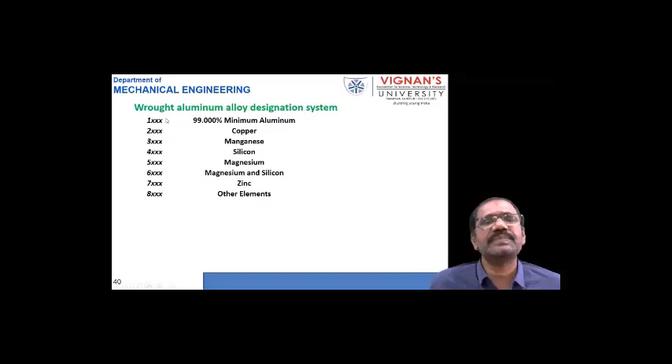Now let us see the casting alloy. So casting aluminum alloy, how we designate it. This is designated with 3 digits with 1 decimal. The cast alloy designation system is based on a 3 digit plus 1 decimal designation, like 356.0. So this is one example.

The first digit indicates, similar to that one, the principal alloying element which has been added to the aluminum. The second and third digits are arbitrary numbers given to identify a specific alloy in that series. So here you don't have the second digit for how many times it is modified. However, it is made by casting, that's why there is a modification for that one.

Next, the number following the decimal point indicates whether the alloy is a casting or ingot. What do you mean by the ingot? Ingot you have already seen. I also told what is the ingot. Freshly taken from the steel industries or aluminum industries. From the bauxite, aluminum is extracted through the chemical purification and electrolysis process. That is called an ingot, which is got from the bauxite.

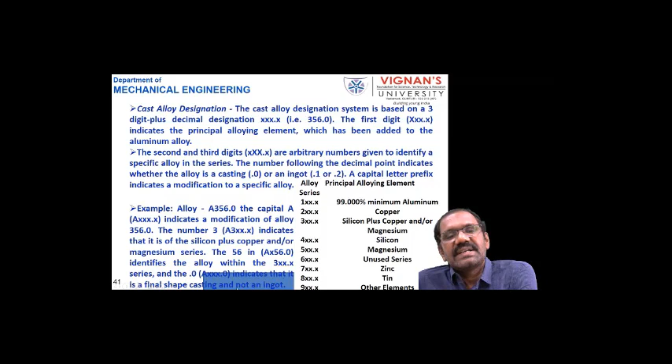3 indicates the principal alloying element. So 3 is what? Silicon plus copper or magnesium is added to that one. 5, 6 represent the identification of the alloy in that series, in the 3 series, and 0 represents that this is made by the casting process, not the ingot material. So like that we can designate the cast aluminum alloys.

Okay, now let us see the properties and applications of the wrought aluminum alloys, 1 series, 2 series, 3 series. So all the series of wrought aluminum alloys and cast aluminum alloys with their percentages and applications we see here. The 1 series alloy is often referred to as the pure aluminum series. Just before starting we have seen 99% up to a maximum of 99.5% aluminum.

These alloys are selected primarily for their superior corrosion resistance, such as in specialized chemical tanks and piping. Generally in the chemical industries, chemically inactive metals we have to use. In such cases we are using this aluminum. In piping also, when you want to transfer chemicals from one place to another through pipes, pumping the chemical liquids, to avoid chemical reaction with the pipes, the pipes are made with aluminum.

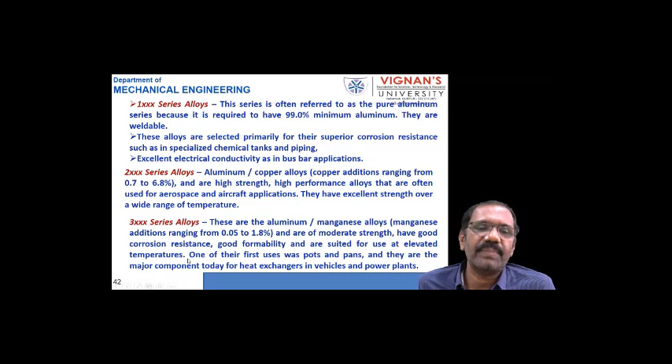Next one is 3 series. You may think that aluminum has a low melting point. When alloying elements are added, its melting point is also increased. 3 series alloys are aluminum manganese alloys, with manganese added from 0.05 to 1.8%. They have moderate strength, good corrosion resistance, good formability, and we can easily deform them. These are suited for use at elevated temperatures. One of their first uses was pots and pans, and today they are major components in heat exchangers in vehicles and power plants.

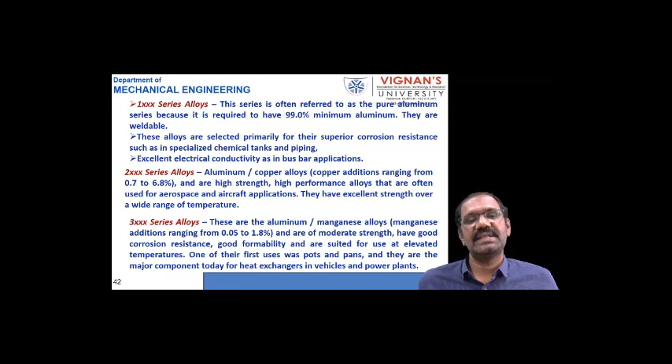Next, 4 series alloys. These are aluminum silicon alloys, where the principal alloying element is silicon, added 0.6 to 21.5%. Silicon, when added to aluminum, reduces its melting point and improves its fluidity. Fluidity means narrow section castings can be made. Just like water, they can move through narrow sections. That is called fluidity.

These characteristics are desirable for filler materials used in welding and brazing applications. We know soldering and brazing; these are solid plus liquid state welding. In such cases 4 series alloys are used. Next one is 5 series. In that one, the main alloying element is magnesium, added to the aluminum from 0.2 to 6.2%. They have good high strength.

So in addition, these alloy series is readily weldable. So that is in welding applications, we can use this series material as filler material, as electrode. For these reasons, they are used for a wide variety of applications such as shipbuilding, transportation, pressure vessels, bridges, and buildings. For welding applications, as they have good strength, these 5 series aluminum alloys are used as the filler material, just like you can say, as electrode.

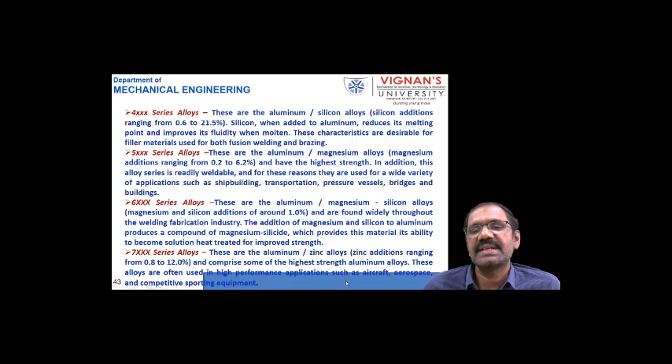aluminum alloys are used. Next, the 7 series aluminum alloys, where zinc is the principal alloying element added to the aluminum. The percentage in 7 series is 0.8 to 12%, and they comprise some of the highest strength aluminum alloys. These alloys are frequently used in high performance applications such as aircraft, aerospace, and competitive sporting equipment. So like that, we have the wrought aluminum alloys.

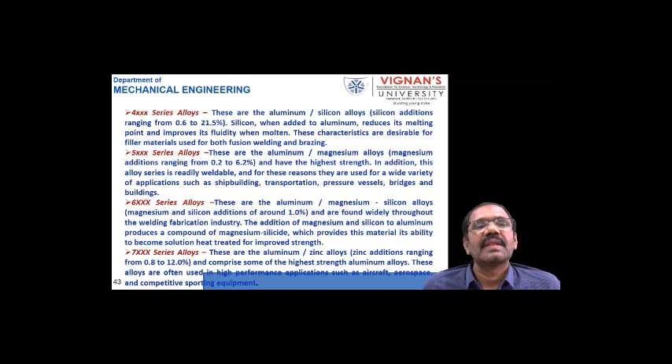So now let us see the aluminum cast alloys, or cast aluminum alloys. These are designated with 3 digits with 1 decimal point. So first one is... one second. Right. Already we have seen the cast designation.

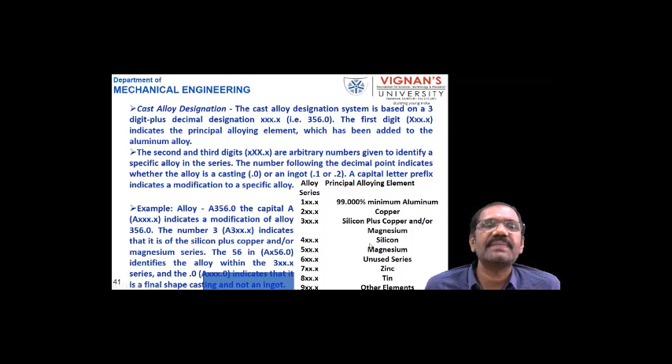One thing I will tell you: in all these alloys you have 4 to 5 common properties. Remembering all the properties is difficult for anybody, even for me, because I have the PPT and I am reading it. So the easy thing, because you have to write the exam: 4 to 5 properties are the same, keep those in mind. For all of them you can write they have good corrosion resistance, thermal conductivity, and good color. These properties are common to all aluminum alloys. So to these three, add 2 or 3, that's all.

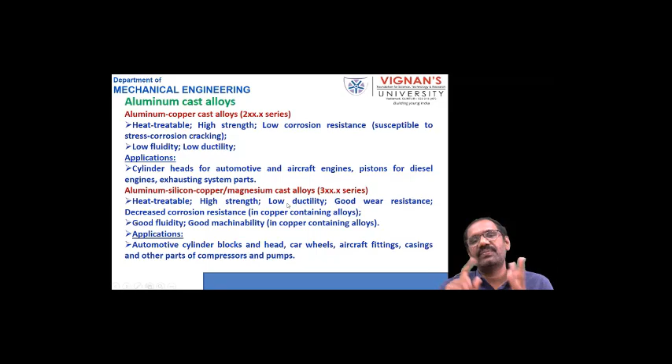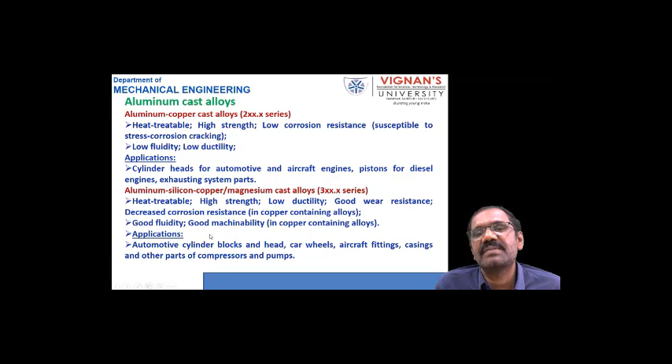Next, 3 series: they are also heat treatable, with similar properties: high strength, low ductility, good wear resistance, decreased corrosion resistance. Because copper and magnesium are added to the aluminum, the corrosion resistance is reduced. But they have good fluidity and good machinability, and are used for automotive cylinder blocks and heads, car wheels, aircraft fittings, casings, and parts of compressors and pumps.

Next, 4 series. This is aluminum silicon cast alloy, meaning silicon is added to the aluminum. They are non-heat treatable, unlike the previous two. They have moderate strength, moderate ductility, good wear resistance, very good cast properties, and good corrosion resistance, and are used in pump casings, thin wall castings, and cookware.

Next, 5 series, aluminum magnesium. Magnesium is the main alloying element in this series. They are non-heat treatable, with high corrosion resistance, good machinability, good appearance when anodized, and moderate cast properties. Sand cast parts are made; this is the application.

Next, 7 series, where zinc is the main alloying element. They are heat treatable, with good dimensional stability during manufacturing processes like casting, good corrosion resistance, poor cast properties, and good machinability. This is the aluminum zinc cast alloy, 7 series.

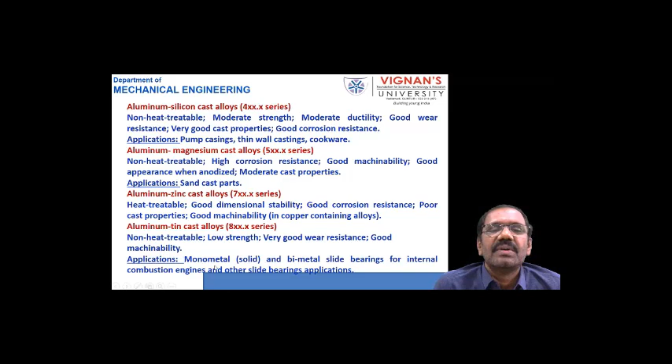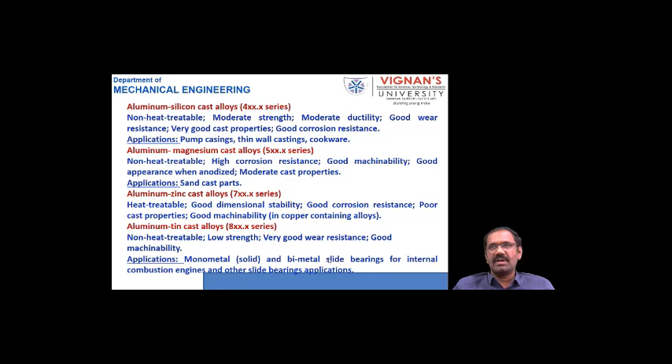Next, 8 series, where the alloying element is tin. They are non-heat treatable, with low strength and very good wear resistance and machinability. Applications are monometal and bimetal slide bearings for internal combustion engines and other slide bearing applications. So these are the different types of aluminum alloys, their chemical composition, properties, and applications we discussed.